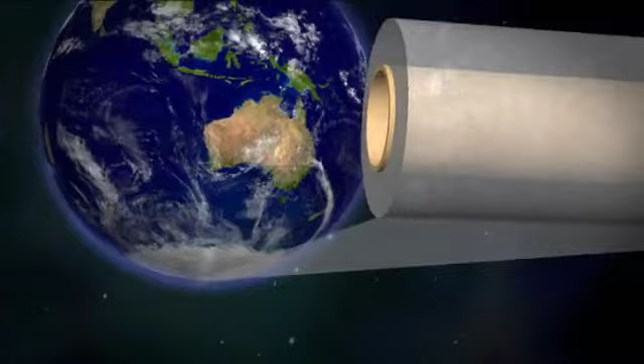There's sufficient ethane in the Sydney ethane gas pipeline at any one time to make enough plastic cling wrap to stretch to the moon and back 19 times. And we're well on our way to building one of the first LNG plants on Australia's eastern seaboard.

With all this gas and oil running through our flow lines, compressor stations and production facilities each day at high pressures, you can imagine the amount of energy stored in all that plant. So how do we control this energy? The answer is with process safety.

Process safety is a crucial part of doing business to ensure our assets are designed, operated and maintained to the highest safety standards. Process safety refers to the prevention and mitigation of a loss of containment of hydrocarbon that could otherwise lead to a major catastrophic event. As they say, it's all about keeping it in the pipe.

Generally speaking, process safety incidents are low-frequency events. That is, they don't happen every day. However, they are generally of high consequence, as we've seen with major fires and explosions around the world.

As you'd be aware, our Environment, Health and Safety Management Standards, or EHSMSs, are the basis for the way we work in Santos. It should go without saying that whether you're an employee or a contractor, these standards are non-negotiable. Process safety requirements are integrated across the EHSMS, most particularly focused around EHSMSs 9, 11 and 12, which outline the keys to achieving high performance in process safety.

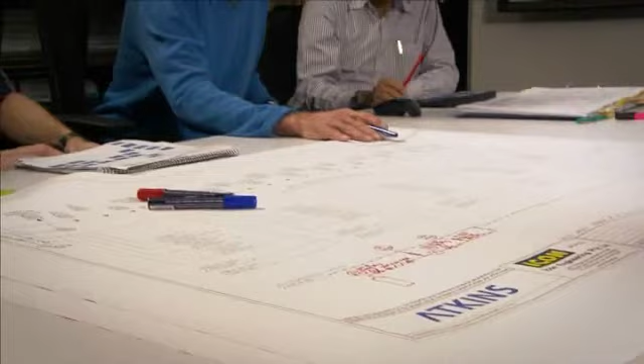For example, EHSMS 9, Hazard Identification, Risk Assessment and Control, outlines what we must do to mitigate the risk of an incident from energy stored in hydrocarbon, including undertaking hazard studies during the life of a plant.

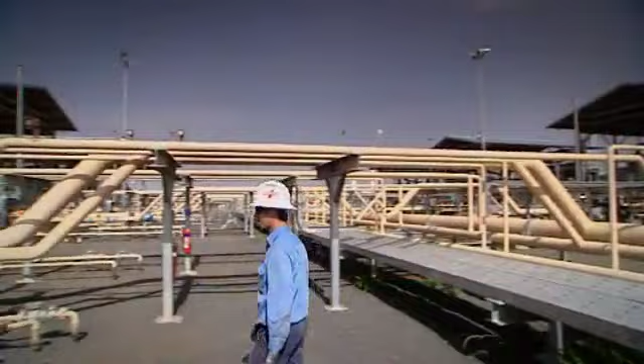However, it's the 11 series, Operations Integrity, that really forms the basis for taking a project such as a new compressor station or recommissioned equipment from the ground up, right through to the time it's decommissioned. So how do we apply EHSMS 11 during the life of that plant?

Well, in the first instance, it helps to think of EHSMS 11 as a number of controls, usually portrayed as slices of cheese, solid barriers to preventing an incident. We'll look at these barriers step by step.

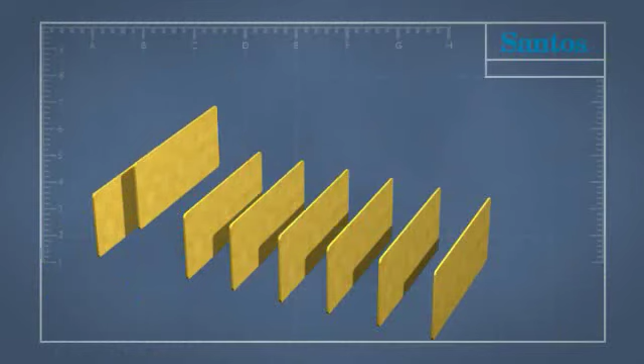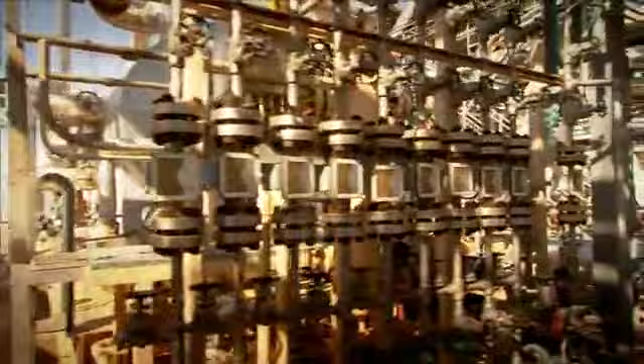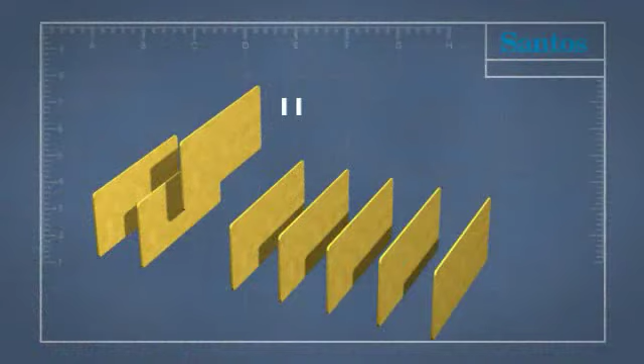Firstly, EHSMS 11.2, Facilities Design and Construction, which requires that our facilities are designed and built to Santos, Australian and international standards. How can we then be confident that the plant has been built to specification prior to the introduction of process fluids? The answer lies in EHSMS 11.3, Pre-Startup EHS Review, which provides the guidance for a thorough review process by a team of office and field-based people.

We want to make sure, among other things, that all equipment has been installed according to the drawings, any non-conformances are rectified, and the system has been cleared of impurities.

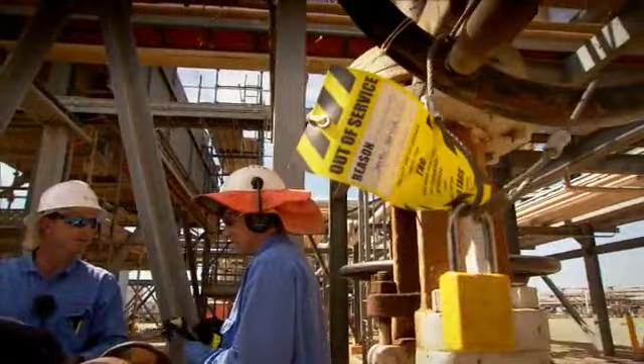Of course, we also need operating procedures and safe work practices to make sure there is no release of hydrocarbon during startup, shutdown and routine operations. That's the domain of EHSMS 11.8, operating procedures and safe practices. The permit to work system, for example, comes under this standard.

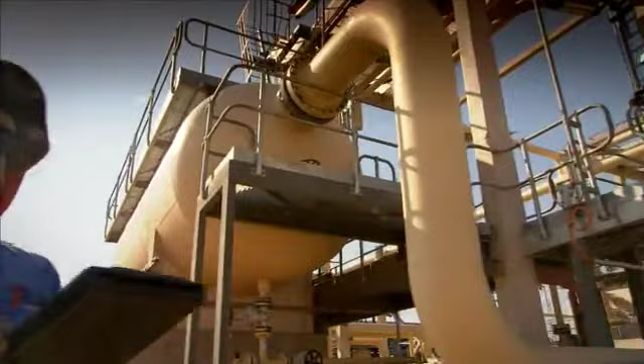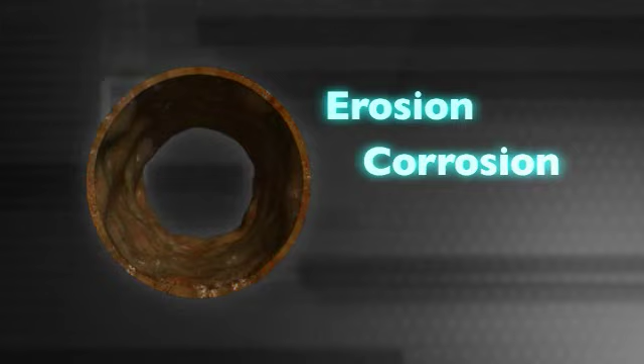In an ideal world, we now have a plant that will run perfectly, year in, year out. However, as we know, hydrocarbons contain impurities such as moisture, CO2, H2S and sand, all of which cause erosion and corrosion, threatening the capability of the plant to perform according to the original design.

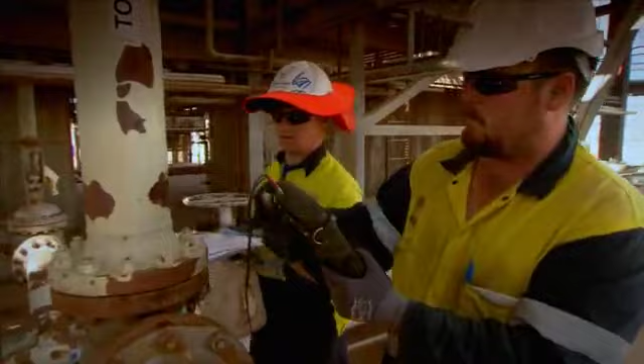Enter EHSMS 11.5, Mechanical Integrity. This standard is about undertaking regular inspections and checks of equipment such as pressure vessels, pipelines, compressors, tanks and process piping, according to Documented Integrity Management Plans, or IMPs.

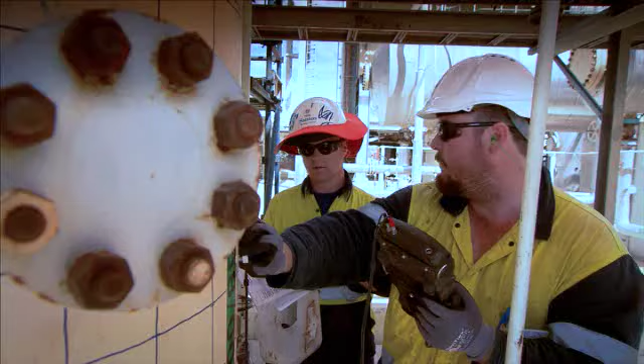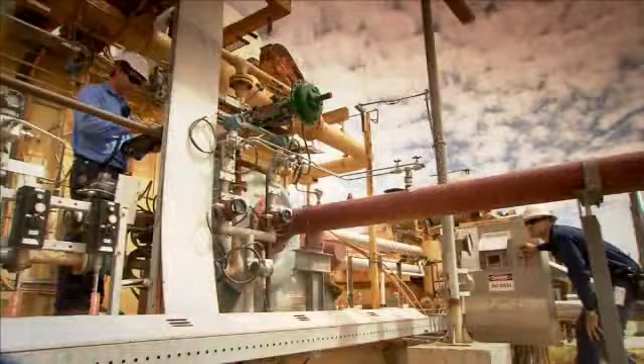Inspection routines are not just restricted to plant. EHSMS 11.7, Critical Protection Systems, provides the guidance for implementing rigorous testing programs for equipment designed to control or detect hydrocarbons in an emergency. We're talking anything from burner management to fixed gas and flame detectors and ESDs.

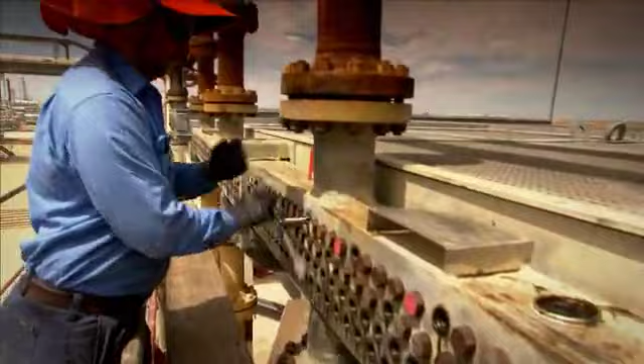Over and above the testing and inspection regimes, Santos maintains a routine maintenance schedule. Robust reliability and maintenance practices are a core requirement to sustainably delivering process safety, and these are outlined in EHSMS 11.9 Maintenance. For example, inspections and preventative maintenance on reciprocating equipment, electrical equipment and so on.

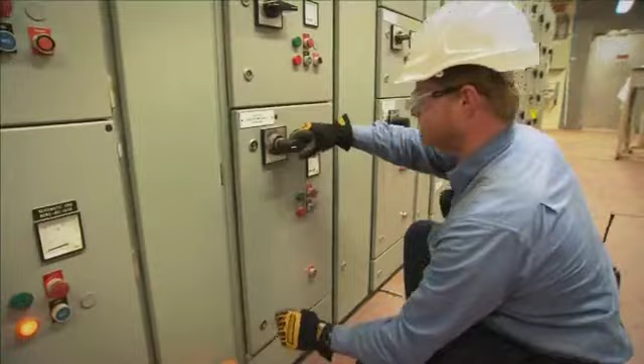To this point, the standards have generally been about preventing or controlling the release of hydrocarbons. Should there be an unexpected release, of course, an ignition source is the last thing we want around plant. EHSMS 11.6 Ignition Control is about restricting and controlling the presence of ignition sources.

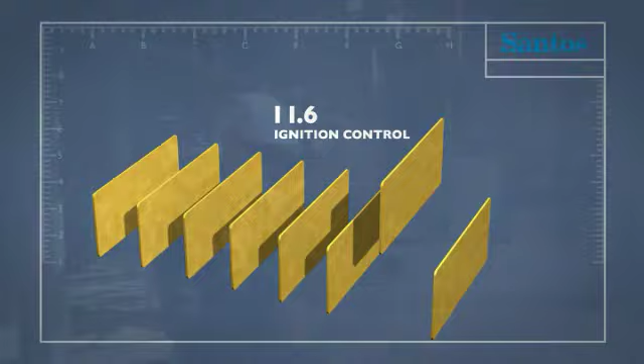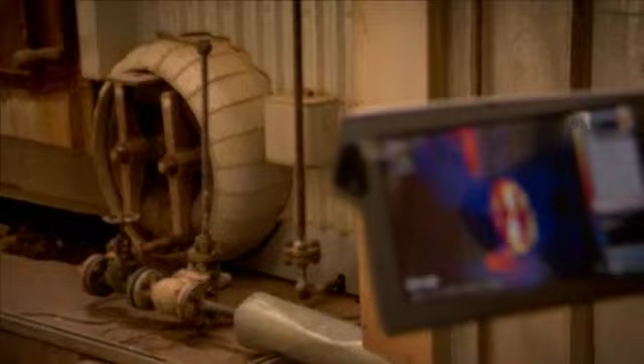The obvious ones include welding or grinding. However, there are the less obvious sources such as hot surfaces, sparking equipment or even vehicles. In the extreme case of hydrocarbon release and fire, EHSMS 11.10 deals with fire risk management.

An integral part of process safety is also about using the management of change process as outlined in EHSMS 12, to ensure that any proposed alterations to plant or equipment is appropriately documented, reviewed, approved and communicated.

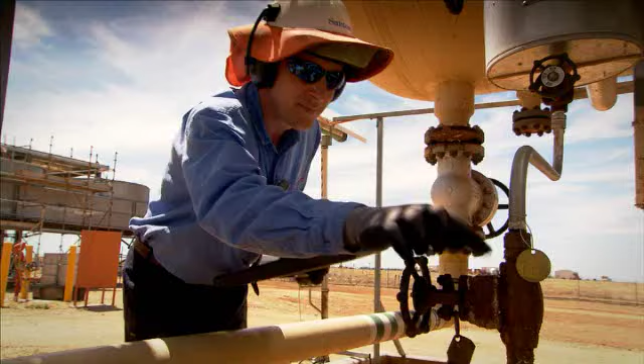There is another key point to make in regard to process safety. That is, everyone has a role to play in reporting any process safety hazards, exceptions or incidents, just the same way that we place a value on reporting personal safety incidents or near misses to prevent the same thing happening again.

As the multitude of catastrophic events in refineries, gas processing plants and offshore platforms testify, there's no room for compromise in a strong process safety model.

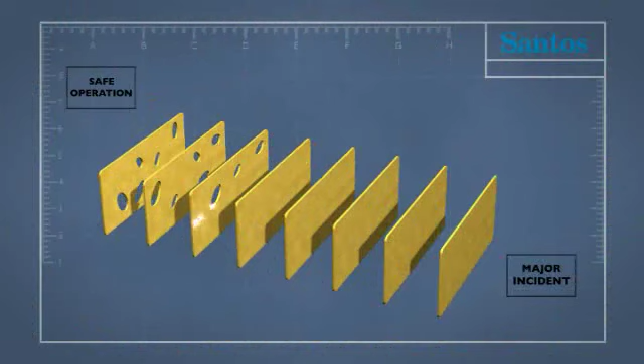In every one of those instances, there were precursor events and telltale signs that something was amiss. The controls that should have been in place had become ineffective. If we revisit our cheese model, this breakdown of controls is represented by holes appearing in the layers or barriers, and now we're looking at the serious potential for an incident to happen.

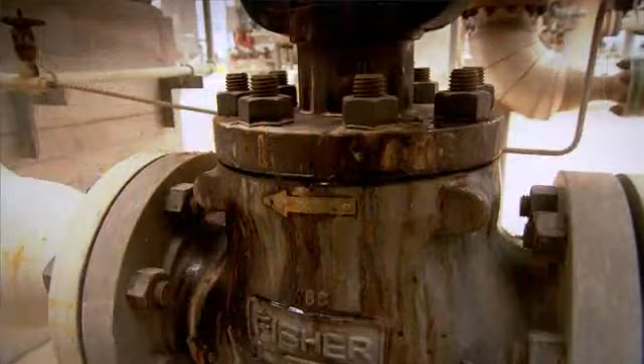So it's a case of questioning and reporting anything you see that looks out of place. A drip or a small leak from a gland on a valve, missing or damaged insulation, worn electrical cable, or work not done to a standard. Even a non-conformance in the permit to work system, reduced cover on a flow line due to a washaway, excessive vibration or an unusual mark on a pipe.

To give you an example, in 2010 an operator making valve adjustments noticed a small mark on the Moomba to Sydney sales gas line. That mark traced back to a crack on the pipe, leading to a controlled plant evacuation and subsequent safe major repair work.

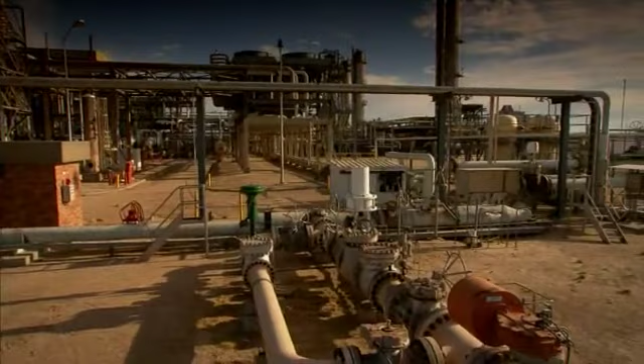Some examples of process safety hazards that have been reported include a non-conformance to EHSMS 11.8 operating procedures and safe practices. An audit found that no one on a work party had been nominated to perform gas tests, and none had been recorded on the permit.

EHSMS 11.5 Mechanical Integrity. External corrosion was identified by an operator on an uncoated and unintentionally buried process line in a satellite location.

EHSMS 11.9 Maintenance. A fuel injector line on a generator set worn through, causing a mist of crude fuel on the genset and surrounding bund.

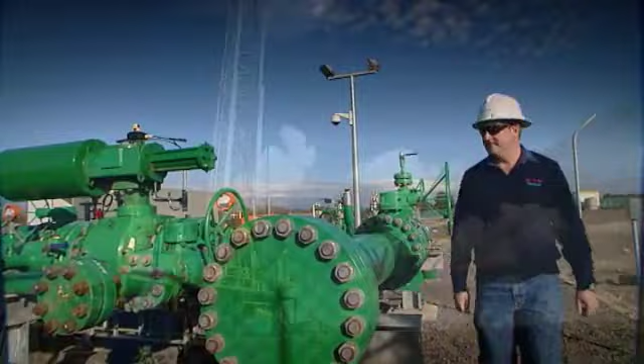So please remember, no matter what job you do and no matter where you work in Santos, you have a responsibility to understand the elements of process safety to keep you, your colleagues and your workplace safe.

By questioning something you see that just doesn't add up and reporting it straight away enables action to be taken before the issue escalates into something more serious. And that means not lying awake after a shift, wondering whether you should have said something.

If you have any questions relating to process safety or safety in general, please discuss these with your supervisor. Have a conversation about process safety with a colleague, or talk to Santos's Principal Process Safety Engineer.